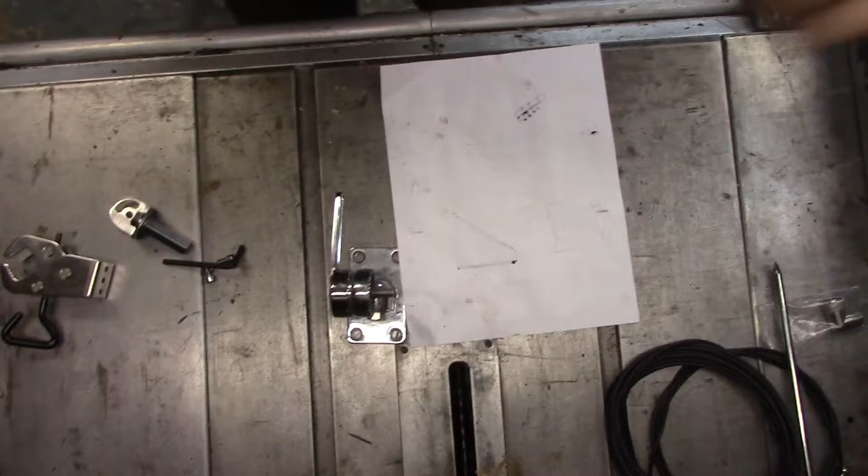Okay, I'm still trying to decide.

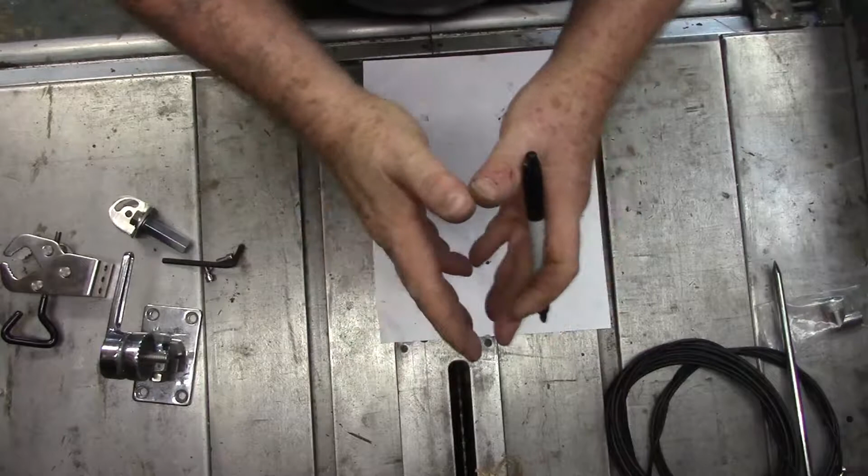I ordered the Yaesu FT891, that's going to go into mobile. I will probably end up ordering the automatic antenna tuner for it as well. I want to see how this Moto antenna performs SWR-wise, with it stating no tuning necessary, which is kind of a tough claim. It's possible within a certain bandwidth, but once you start going out it may change. So at that point I may go with the tuner.

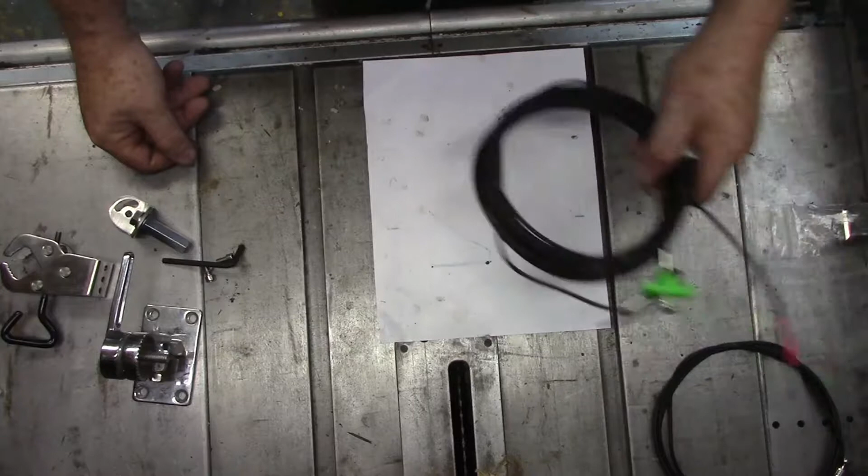Now, I was talking with James over there, and he said that they've tried experimenting with this wire around the drip edge, and it didn't work. It actually gave them a bad higher SWR. They were getting radiating off the vehicle, not radiation like nuclear radiation, but radiating from the vehicle, and they were having problems with it.

I said, well, what if I had raised it 6 inches off all the way around, almost like a rack? He said no, they even tried running the wire from rear to front, straight across, not touching, and it was still just too close.

So this idea is out. That'll be working basically as a temporary setup when and if I ever get my ass out of Connecticut.

So then I was going to mount it on the rear side of the vehicle. I don't think this should be this way, but I'm going to do it this way. They had the lock washer on the other part, and I would think the lock washer should be on the part that's stationary, not so much the part that you're always loosening.

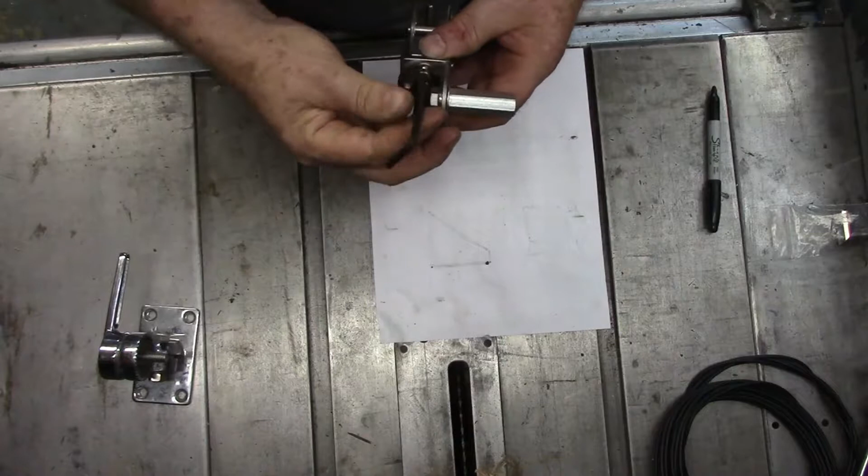What I was going to do was, on the rear side of the van, I was going to put not a lift and lay mount, but more so a ratchet type lift and lay, or an adjustable mount. Okay, hold on, I'll show you what I was talking about. I've already showed it once, but I'll show it again -- just trying to do more than one thing here at the same time. So I was going to use something like this.

This is like a marine antenna mount. It has a ball here where your antenna screws on. I can't find the other side of it, so I would have to buy a complete system. But I was going to use this -- this way I can mount it.

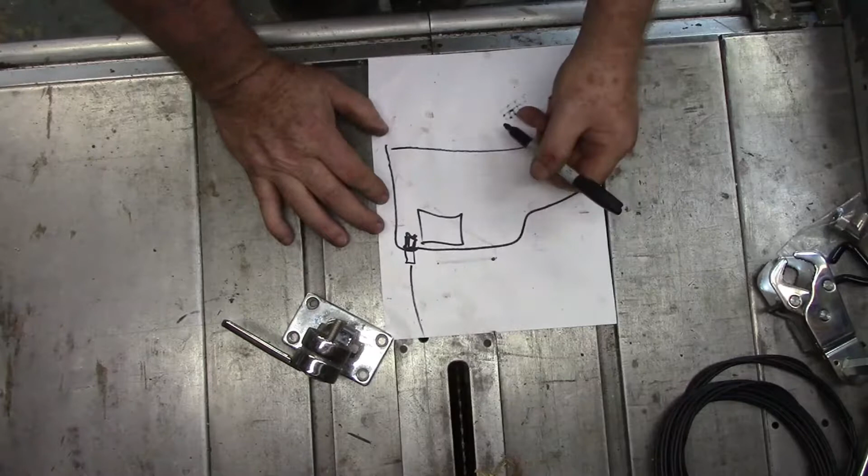If I'm looking at the van, I can mount it right here. Here's the windows in the van, I can mount it right here on the metal. The coil would be just above the roof, and then the 5-foot steel whip. If I'm going into an area I have to worry about, which is rare around here -- there are a few, but very few -- all I have to do is go out, loosen this, lay the antenna down, lock it, and it would lay down this way using the steel, not the 13-footer.

This is only going to be used if I'm stationary. So that's kind of like what I was going to do. I was doing it this way because I like to keep the coil above the roof, above whatever it's going to be radiating off of, so to speak. It doesn't have to be high, I just want it above the roof. So that's why I was going to do this.

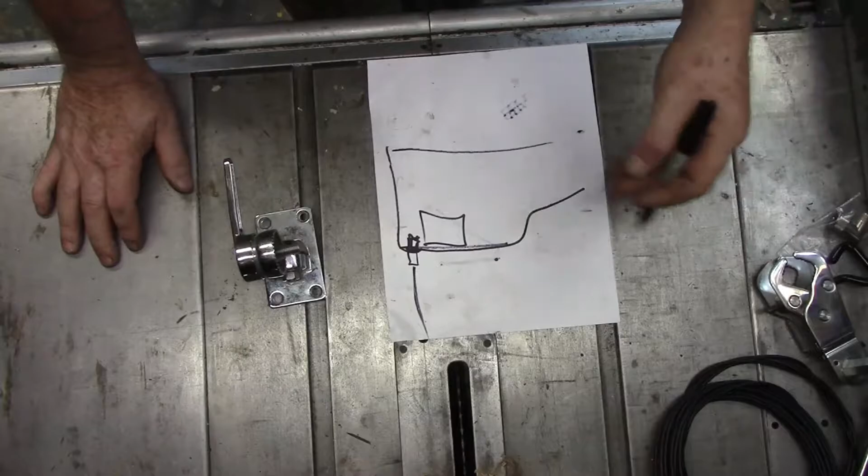So I'm thinking, what am I going to find? What can I do? What's out there? This is going to be the best bet if I had a complete set, which I'm thinking about buying. Bolt it right to the van -- it's got a good ground, and the antenna screws into it.

I'm perfect, I'm just above the roof, so the mount will be there. The coil's bottom will probably be even with the roof, but about 7 or 8 inches away, so I have no problems with that. So that was one of my options.

Then I was thinking, well, wait a minute -- this is going to give me height.

It's going to give me the clearance I want, but it's also going to put me 5.5 feet above the roof. Normal driving, I don't normally have any problems around here. We have very few streets with low limbs hanging around, but there are a few. In the wintertime, there's more than a few.

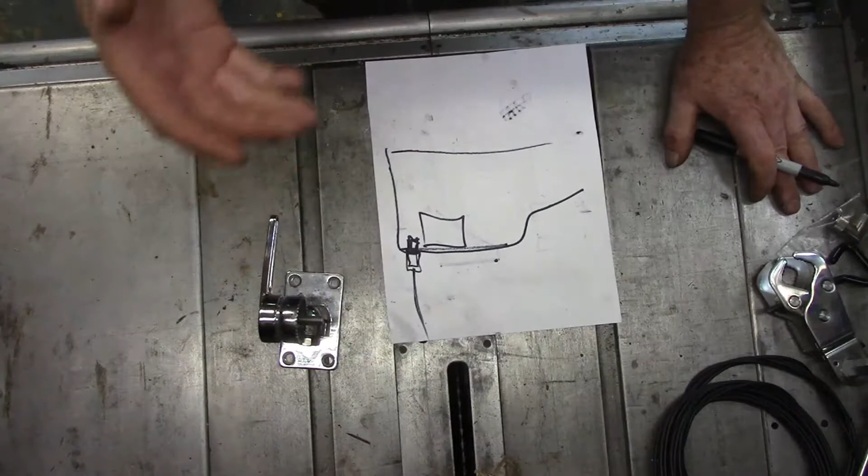Sometimes if I have to go out on a call, it may be because wires are down, so I may have to sneak under to get to the other side. This antenna being up there would be a no-no, so I would have to be able to lay it down.

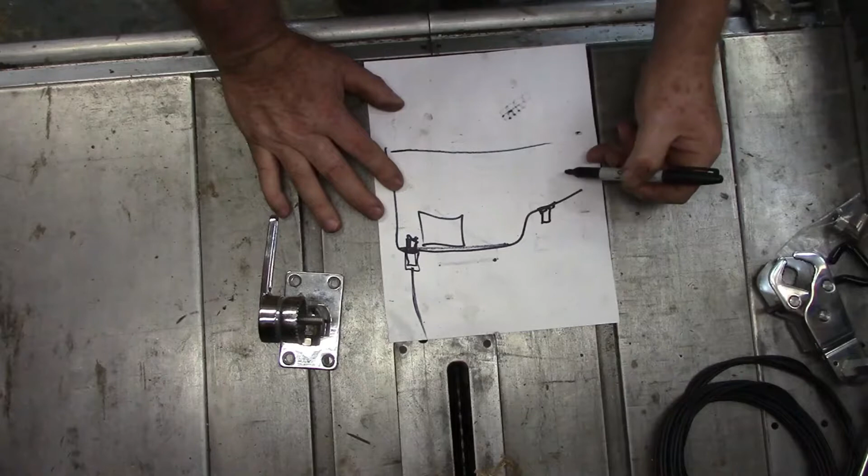Then I thought, wait a minute, what would happen if I bought an adjustable lip mount and put it on the lip of the hood? This way the coil will be here, so it's away from the van basically. This is the windshield, so it's not a big deal.

Actually, my van has a little bit more like this. It's an Astro van, and I can move this down about midway, so the coil would be here. I still have the 5-foot steel, but I'm now going to need to be 2 foot lower. So that may be the practical place to go with it.

So that, but this way, it's right here. I can do a measurement on what I need for coax so that I would have a good match.

You don't want to cut your coax to fit, so to speak, especially if it's going to be a short distance. You need X amount of coax in order for it to radiate right and to match right. So I'd have to figure what I would need. If I wanted to cut it to fit, I'm talking maybe 2 feet, 3 feet, less than 10 feet. So that may work in this case.

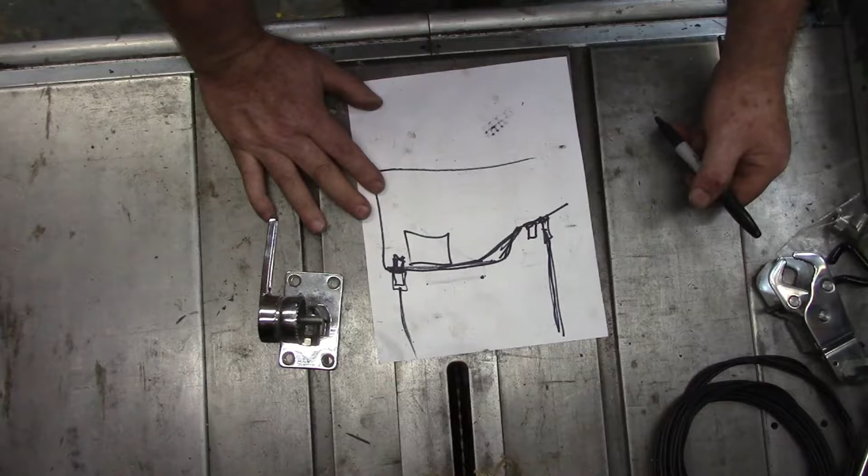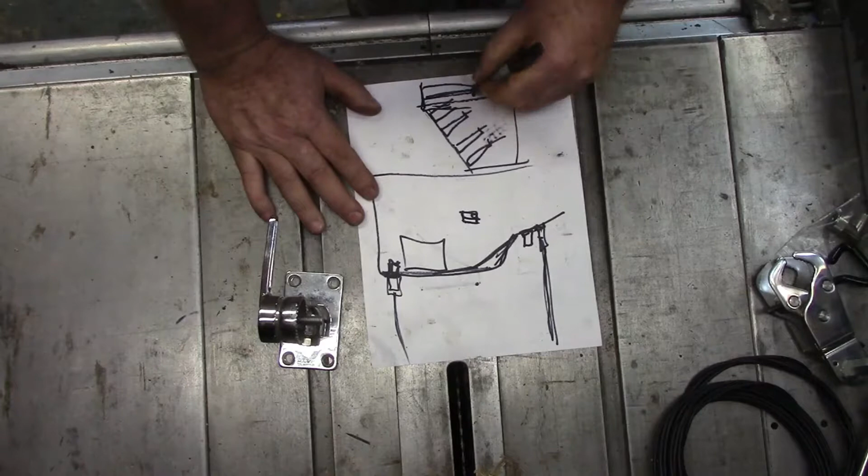Then the tuner, once I get the tuner, will be in here as well with the radio. I've got a thing I made, it looks something like this, and it's got shelves in it like this, with an open front, so all the radios sit down in here like this. It's got another one here with an open bottom, so I can slide the tuner right up underneath there. I also have a power inverter, 1800 watt power inverter, down under there as well. So that's how that would work.

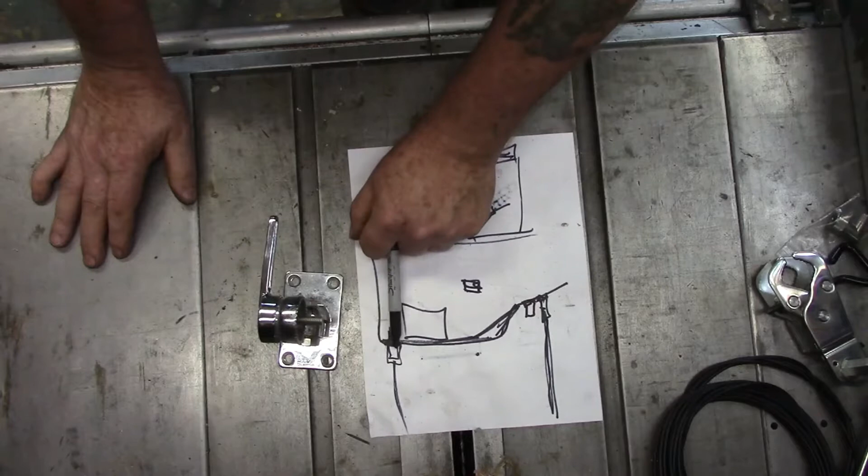So for you guys that are using this antenna, what do you think? Should I just buy another mount and put it here, or buy a mount and put it on the lip of the hood? I gotta buy a mount regardless. If I buy the mount here, it's going to have to be one that I can ratchet down, so it'll be like this mount.

If I buy one here, it'll just be a small adjustable type, where I can adjust the bottom on an angle. I don't want one that has a little ball, because I don't think the ball is going to take the weight of that, and if it did, it's not going to take the weight if I was to go stationary with this on a bad wind. So I need a good strong mount for that.

So you guys that are running these mounts on your vehicles, what do you find? What do you think? Give me some ideas here, guys. Should I really do that? Should I take my Astro van and put one here, where the coil will be here, on a lip mount? And again, I don't mind drilling holes.

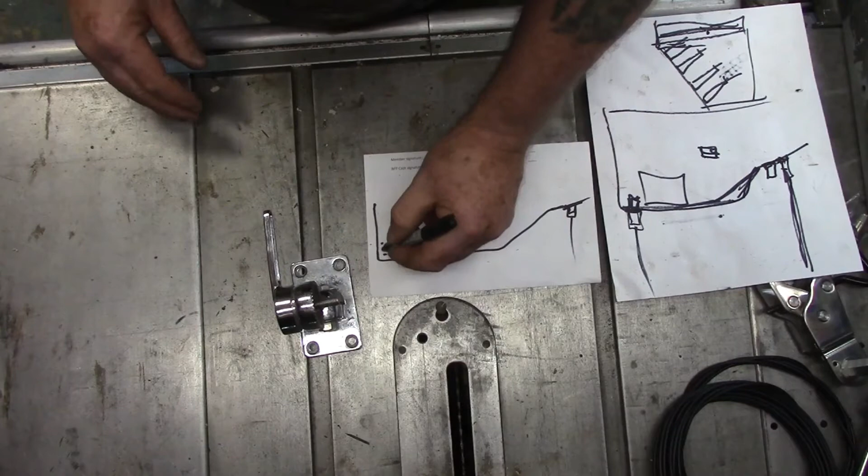Or should I just drill 4 little holes here, naturally my other hole, and I have a cover for that, one of those shell covers for a drip loop, and just put it back here and have it—the coil would probably be even, the bottom of the coil will be even with the roof of the van. What do you think, guys? Give me some ideas.